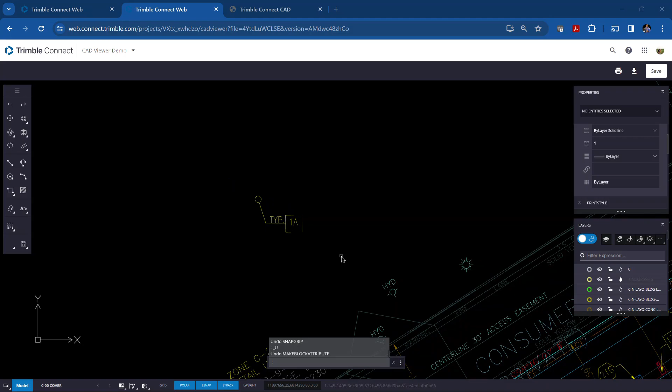So what we're going to do now is we're going to make a block, but this block is going to have what's known as an attribute. So if we take a look over here, we've got these callouts where you've got 1B and 1A. So where you make a block with an attribute is that you want to make one block and then you can change that piece of text or that variable within that block.

So the first step is you have to make the actual attribute. So we're going to replace this piece of text, or this simple note as it's called in the ConnectCAD viewer, with what's known as an attribute. So I'm going to go in and say make block attribute instead of make block. And the name is going to be curb. We'll just call it curb callout or CC.

Actually, let's just name the whole thing. We'll go curb callout. The caption is kind of like a placeholder, so we'll just call it CC. And then for a default value, we'll do 1A as the default value. Now we're going to come down here and we're going to change the height. So the height's going to be 2.5. We're going to rotate it at 0 because we want to kind of put it in here.

And then we're going to pick the insertion point. So we uncheck this. We'll pick the insertion point where we want it to kind of be, which is right here. Actually, let's specify later. Let's click on that. We want to keep it locked in the block, and I think everything else is set the way we want. So you really just got to set the height, the text style that you want.

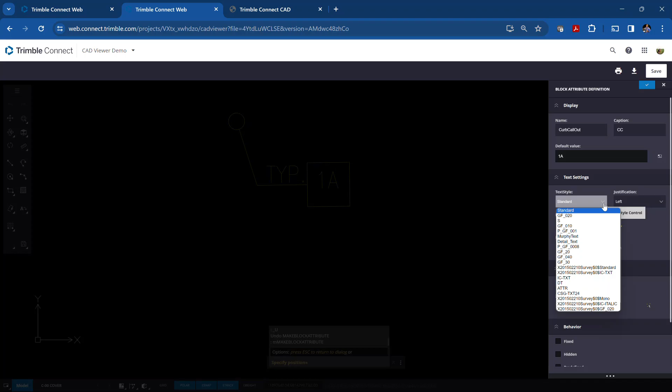So if you want it to be this particular text style with a height, and then you hit the checkbox, and you can see how it says curb callout. So we're going to place that like right here. Even though it extends out over there, it's not going to show up when we actually make the block. So we want to get rid of this. So we're just going to delete that.

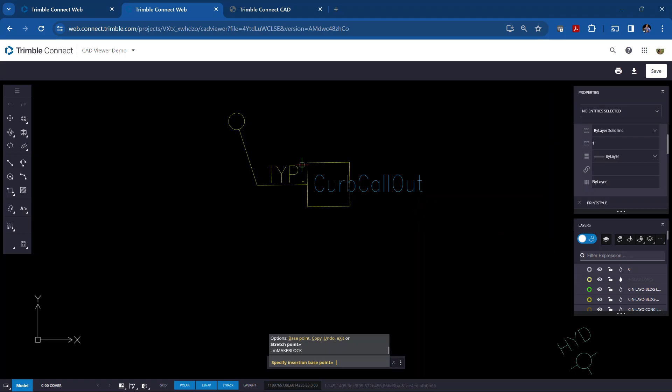And then you're going to go and you're going to make the block this time. So you're going to go now make block. And we'll call this curb callout. The units is fine. The base point is basically where you're going to insert. So that's going to be this right here. And then we're going to convert to a block.

And now we want to select the entities. So we want to come down here, select the entities. We're going to pick all of those, including the attribute. And you can have multiple attributes as well. So then you're just going to press enter. And you can see now it shows up as the block. And then we click the checkbox.

And you'll see now it shows this attribute, which is value 1A. Right? So that's the default. So we'll click on that. And now we've got that 1A attribute. Now, if you insert the block, right? So we type in INS block, and now we're going to insert that curb callout. So that's the default name.

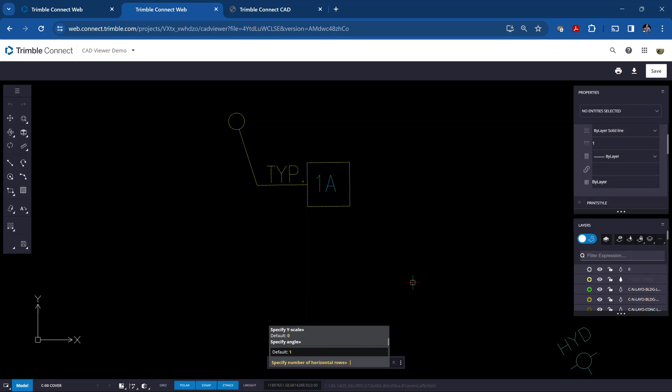So when we click on it, now you'll see that it's going to ask us for our scale and angle and how many we want. And now it's asking us for that curb callout, right? So now this is 1B. And when we do that, now it's 1B. So we've got that curb callout.

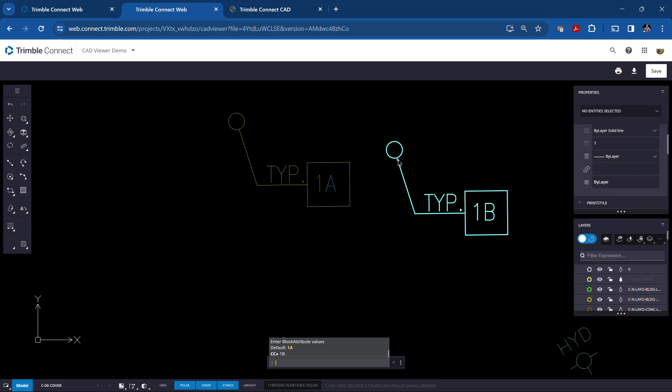Now you can double left click on this. So we click on this one, you can see the values over here, what layer it's on. So you're really able to edit this block. So maybe this is going to be 1C, or maybe it's a CG instead of 1C, 1A or 1B. And then when we change that and click OK, it changes that property value.

So when you're making the block and the text, you want to make sure you put it on the right layer, and you have the colors of everything that you want. But I just want to kind of show you what this attribute tool does to make these blocks with attributes.